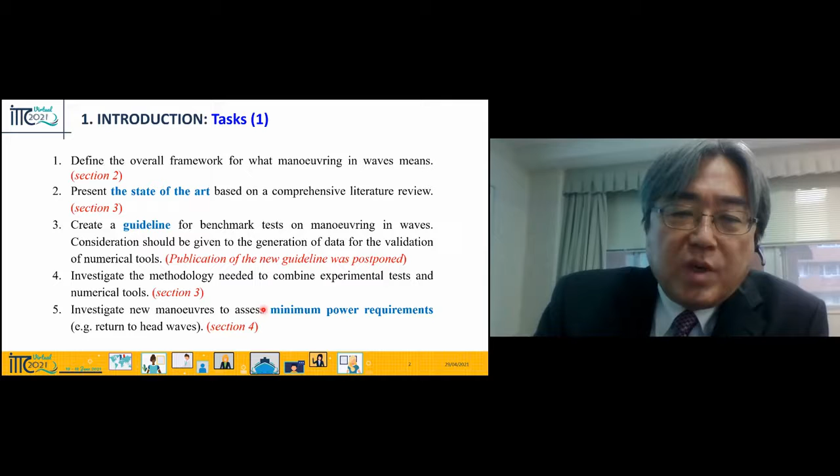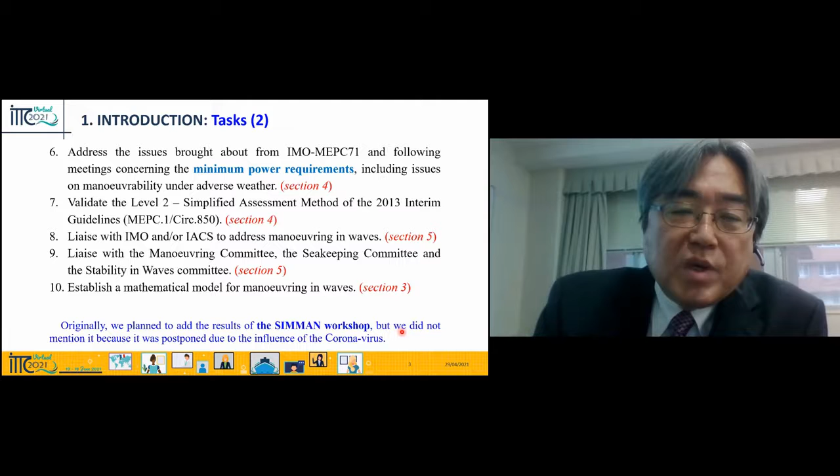Also, find the keyword of minimum power requirement. Originally, we planned to add the results of the SIMMAN workshop, but we did not mention it because it was postponed due to the influence of the coronavirus.

So the main topics in my presentation are shown here: state of the art of the prediction method of ship maneuvering in waves and minimum engine power requirement. Based on these results, we will describe the conclusion and the recommendation.

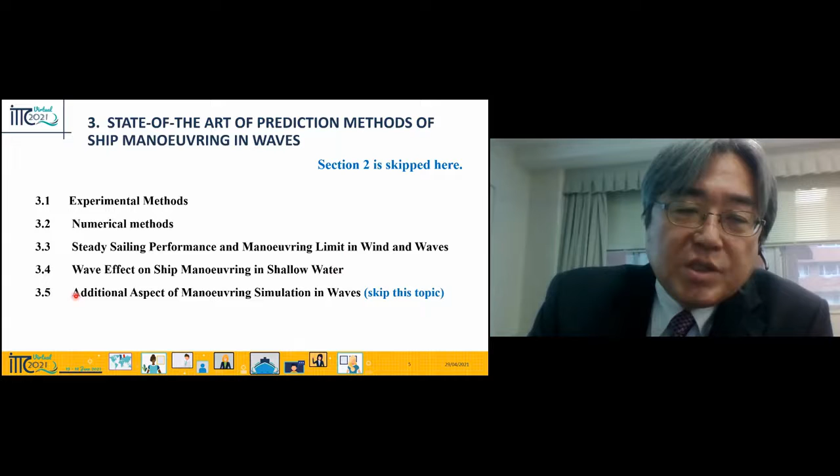The state of the art of the prediction methods of ship maneuvering in waves. In our report, you can find it in 5 sections: first, experimental method; second, numerical method; third, steady sailing performance and maneuvering limit in wind and waves; fourth, wave effect on ship maneuvering in shallow water; fifth, additional aspects of maneuvering simulation in waves. But this time, I'd like to skip these topics.

Experimental method. The experimental method was composed of 2 types of tests. One is a free-running test in waves; its main purpose is capturing the motion in waves of the ship. The second one is the captive model test; its main purpose is capturing the force and the moment acting on the vessel moving in waves. The purposes are quite different.

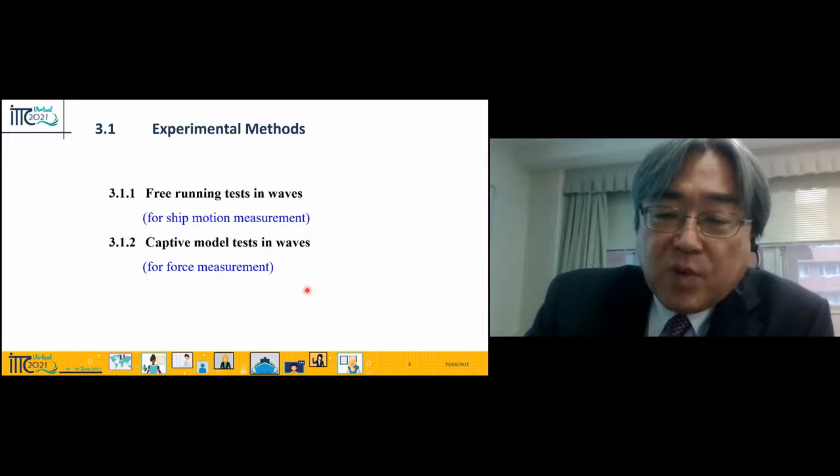Free-running test in waves. Nowadays we can find a lot of papers on tests in regular waves and also tests in irregular waves. Of course, the actual sea is not regular, it's actually irregular, but tests in regular waves are quite useful to understand actual phenomena about ship motion in waves, and for checking theoretical methods, the regular wave test is really useful.

In 1980, Dr. Hirano carried out the free-running test in regular waves. Nowadays you can find a lot of free-running tests have been carried out. In irregular waves, in 2006 Yasukawa carried out the test. The number of such tests is not as many as regular wave tests, but I think tests in irregular waves are really important because actual seas are irregular.

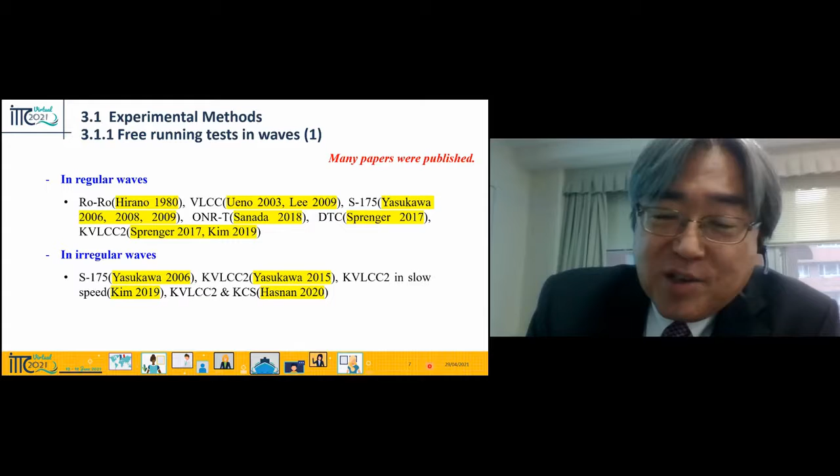Here I would like to introduce the measurement system, especially for measurement of the position of the ship motion in waves: the total station system. The total station system is a fully wireless system for position measurement.

This total station system originally comes from the civil engineering field. In this figure, you can find some boats here, and these are prisms for position targets installed on the boat. The target is basically a prism, and you can see this photograph of the prism.

This one is a camera of the total station. This camera can track the ship model position relative to the prism automatically from the side. This is the photograph of the camera of the total station; you can find a black circle here like an eye, which automatically tracks the target.

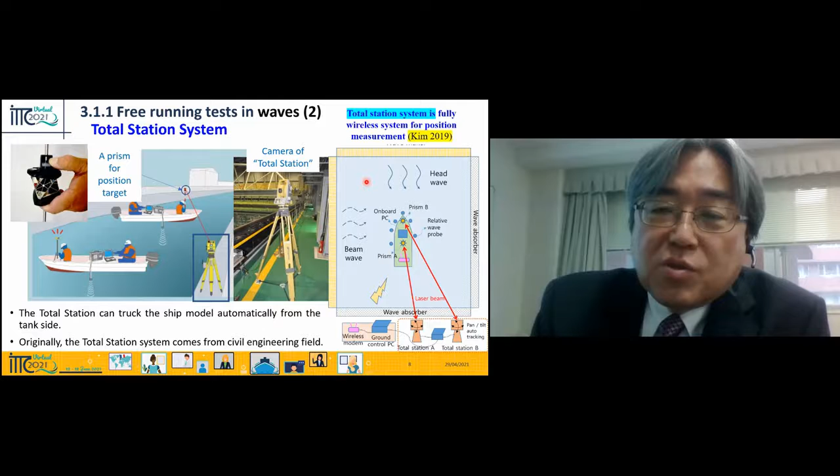Then we can measure the position. In 2019, Kim used this total station system to measure the position of the ship model in waves. That is the result: you can see the figure about the turning trajectory in regular waves.

You can find a lot of turning circles here. There are totally 6 trajectories plotted: calm water trajectory and trajectories in waves, where the wavelength changes, lambda by L equals 0.5 to 1.5. The waves are coming like here, and the ship is approaching like here. After executing the rudder steering, the turn starts and the trajectory moves like that.

So this is the trajectory in the free running model. You can find circular turning. In the wave cases, some drifting occurs during the turning.

Generally, the ship drifts in a direction different from the wave direction during turning. The wave direction is here, but drifting directions are like here in the case of lambda by L equal to 1.0 for the trajectories. In the case of lambda by L equal 0.7, drifting directions are like here. For lambda by L equals 0.5 cases, drifting directions are here.

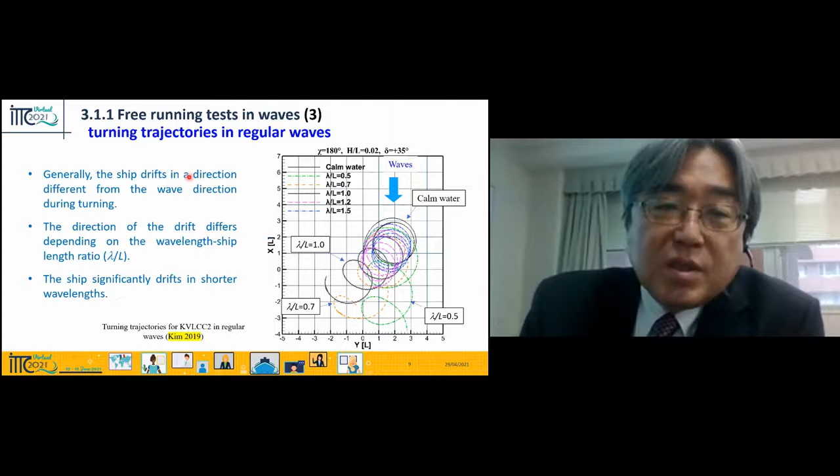This black line results from lambda by L 1.0, but in the case of lambda by L 0.7, it's shown as the dotted lines here. In shorter wave cases, the green lines here show the drifting distance, which is much larger compared with the result for lambda by L 1.0. So drifting phenomena during turning, both direction and drifting distance, depend on the wavelength.

In oblique cases, for heave and pitch, the wave-induced motion amplitude tendency is almost the same as the drift angle equals 0 cases. Then there are 5-degree drift angle cases and 10-degree drift angle cases, with almost the same heave and pitch amplitude.

But for sway and roll, the lateral motion, there's a big influence. Of course, in the drift angle equals 0 case, sway is almost 0 and roll is almost 0. But with some drift angle, sway and roll appear more, and in the case of roll, they become quite large values in the long wave cases.

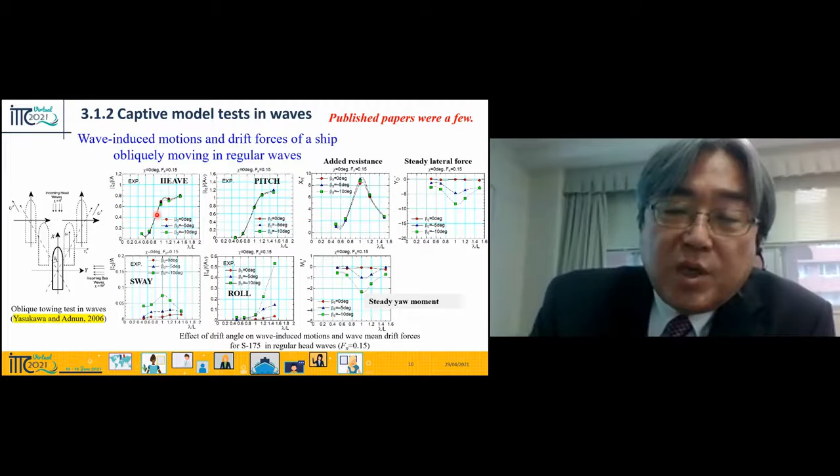Okay, next I will talk about the numerical method. Works addressing the topic of maneuvering can be classified into 4 main groups: the mean wave force method, the two-time scale method, the unified method, and the CFD-based direct simulation method.

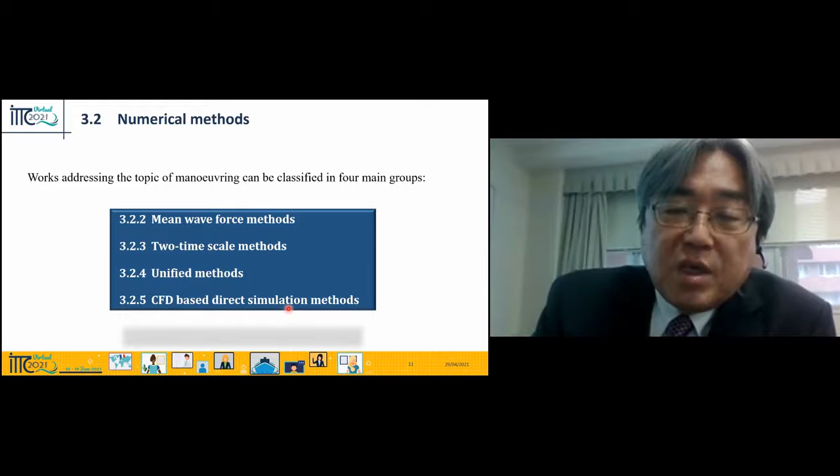First, I will describe the mean wave force method. Basically, this method is almost the same as the usual maneuvering model. There are no changes to the maneuvering model, but only mean second-order wave forces are added. The mean second-order wave forces are calculated previously for all headings, frequencies, and speeds, and stored as multidimensional tables. In that sense, the mean wave force method is quite simple and nowadays widely used.

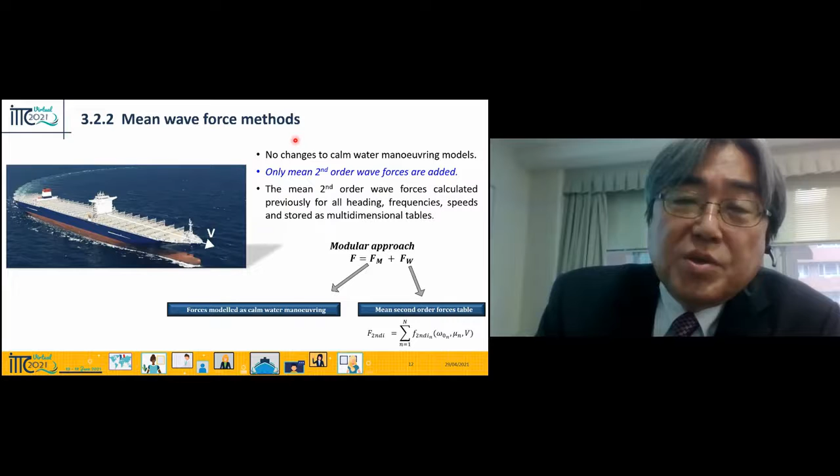Next is the two-time scale method. In this method, first we assume that the maneuvering in waves total ship motion is expressed as the usual maneuvering motion plus wave-induced motion. Because the maneuvering motion is basically low frequency, but the wave-induced motion is high frequency, we can treat these two separately.

So the usual maneuvering model is basically the same as in the mean wave force method, but we also have to consider the seakeeping model. The two models are solved separately, and then, of course, information exchange is really important. After solving the maneuvering problem, we can get the ship position, ship orientation, and ship speed.

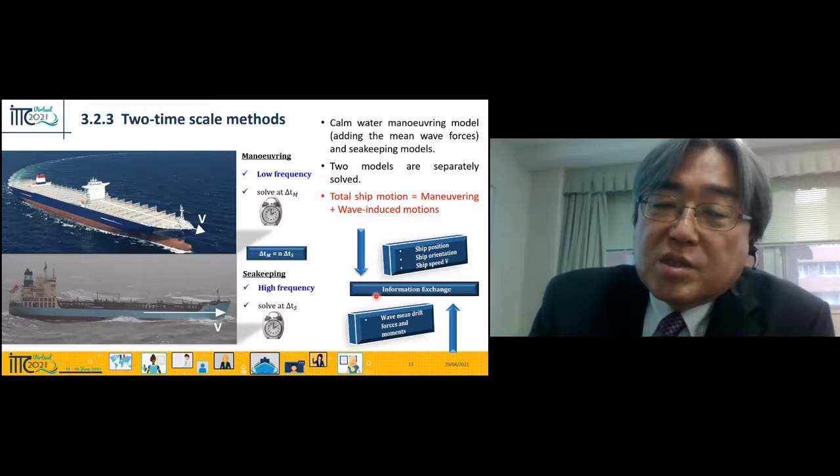Based on such data, we can calculate the wave-induced motion in the seakeeping model. So this kind of information exchange is really important.

Next is the unified method. This one is a more general formulation. The motion equation here is basically 6DOF, a 6 degree-of-freedom motion equation is treated. But the problem is the prediction or expression of the forces and moments acting on the ship.

When considering maneuvering waves, we have to consider the first maneuvering forces such as the rudder force, propeller force, and some damping force related to maneuvering forces. At the same time, we have to consider the radiation forces for seakeeping sense, and the wave-induced force. This method easily includes a nonlinear effect through the nonlinear Froude-Krylov forces, and we have to consider the second order mean forces. The rational prediction, rational expression of the force and the moment, that is a problem. But this general formulation is possible.

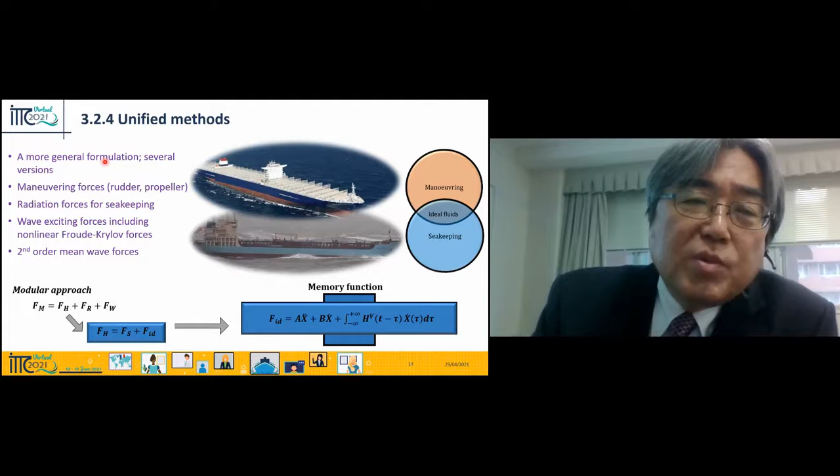So then now there are several versions. So then here we introduce the calculation example by the two-time scale method.

So this one is a turning trajectory in waves. The rudder angle equals 35 degrees for starboard turning. Waves coming here means beam waves. Lambda by L equals 0.7. The result is in regular waves.

Red color means calculation results, trajectories. Dots in blue color are experiments. The calculations capture well the tendency.

Okay, this one is a comparison of the time histories: yaw rate, drift angle, the heave. This is a calculation of the yaw rate, calculation example. You can see the 2-time scale method captures well the high frequency phenomena, and the agreement with the experiments is acceptable.

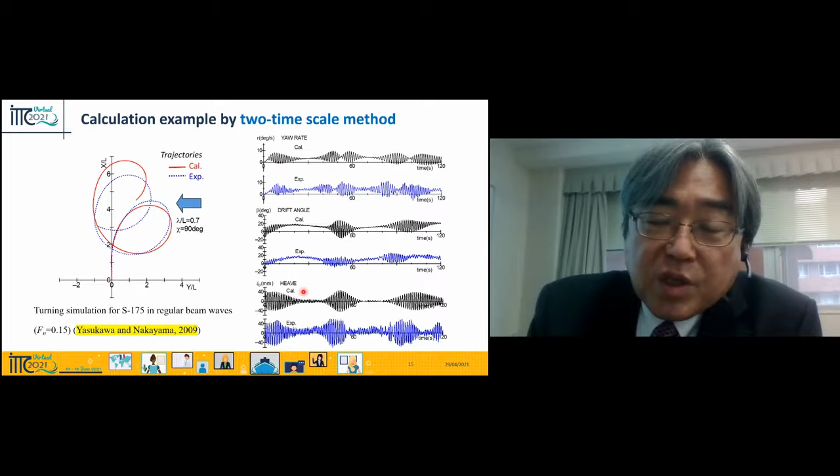Drift angle is here, heave motion during the turning. So then there's an agreement between calculation and experiment that is acceptable.

Okay, next is a CFD-based direct simulation method. Direct simulation using computational fluid dynamics provides a better understanding of the hydrodynamic problem of ship maneuvering. It can solve specific local flow details around the hull and its appendages together with the ship motion.

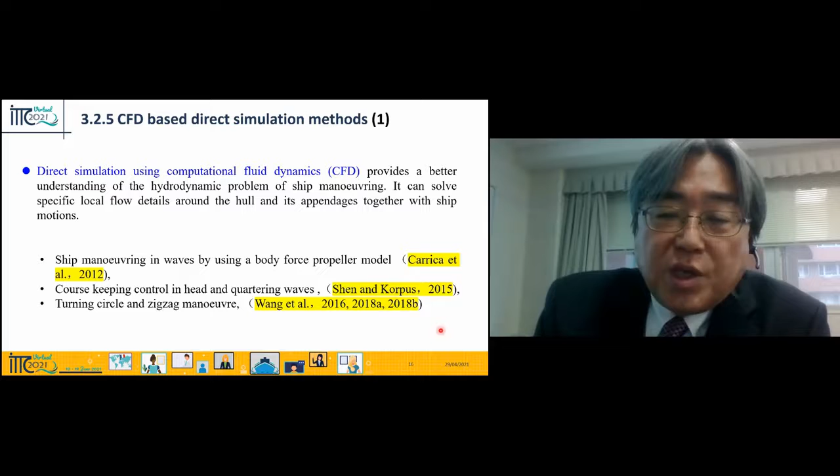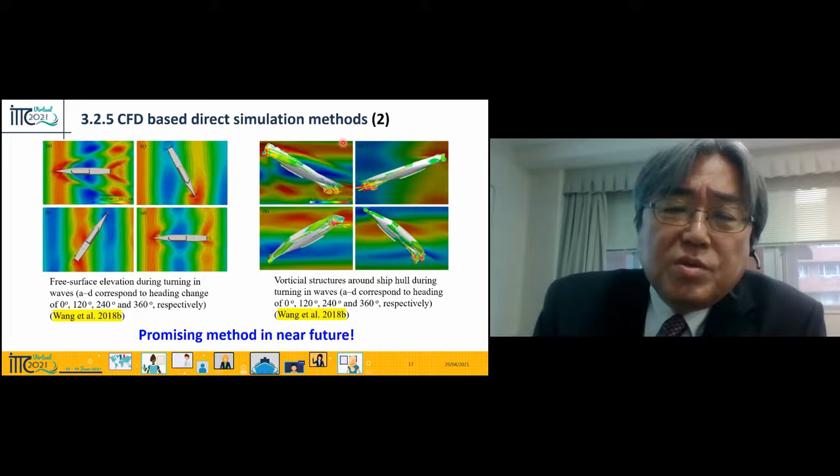So then now several papers are published as shown here. Okay, here I'd like to introduce the results. So then you can find this one is turning in wave cases, and you can find some deformation of the free surface. At the same time, we can capture some flow detail, especially in the vortical structure around the ship hull during turning in the waves. Nowadays, computational time is quite huge, but I think they're really promising in the near future.

Okay, next I'd like to talk about steady sailing performance and maneuvering limit in wind and waves. What is steady sailing performance? This one is composed of 2 elements. One is average steady sailing condition, SSC, such as check helm, speed drop, hull drift angle, etc. of a ship moving straight in constant wind and waves.

This value is easily obtained by solving the motion equation, the steady motion equation. So then we can get a steady solution. If we can get a steady solution at that position, we can check the course stability. So then there's the steady value SSC and course stability checking. So then such kind of performance is called steady sailing performance here.

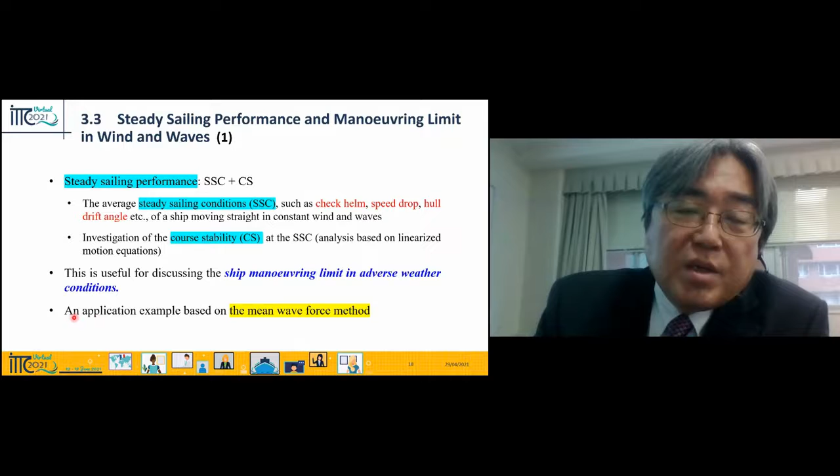This one is really useful for discussing ship maneuvering limit in adverse weather conditions. This is basically treated as an application example based on the mean wave force method.

Okay, this one is a result. This one is a steady solution with steady ship velocity, check helm, hull drift angle. In that graph, the horizontal axis means 0 is the heading angle, 90 degrees is beam waves, 180 degrees is following waves. So then we can change the weather condition from Beaufort scale 6 to Beaufort scale 10. In the case of Beaufort scale 10, ship velocity is 5 knots in the wave, in head wave cases.

So then the maximum check helm is almost 10 degrees, so this ship has a sufficient margin for safety. Anyway, this one is the result for a pure car carrier. So then the maximum hull drift angle is almost 7 degrees. Based on such information, we can discuss the maneuvering limit in wind and waves.

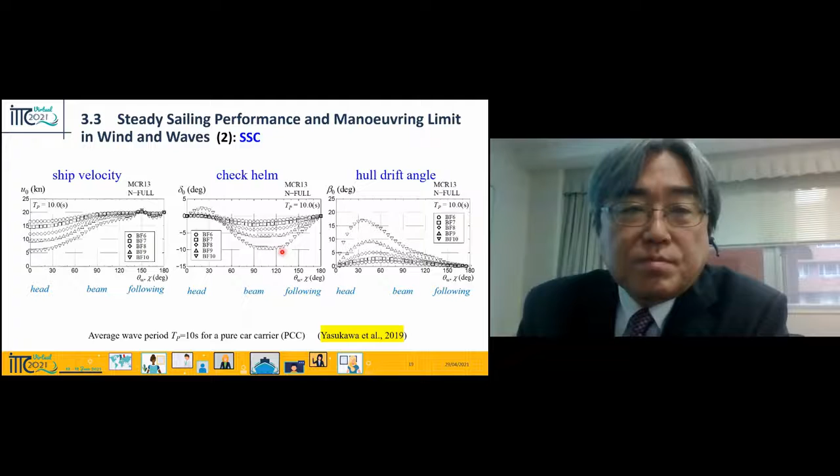Next, wave effect on ship maneuvering in shallow waters. This is a really complicated problem because there is a limitation more than the water depth. So then there's a wave coming, and there's ship motion that appears. So it's a really complicated problem to deal with.

So then this result was from Tello Ruiz et al. in 2019. This result includes lateral force, roll moment, yaw moment. They only measured steady force and moment in shallow water in head waves. Results show the mean wave effect is larger at low speed cases, but drift angle effect on the mean wave forces is not so significant.

But this experiment has some big restrictions because they carried out tests on a fully fixed ship model, with no induced motion. In the seakeeping sense, they just carried out the test as a diffraction problem. So then I think more work on these topics is yet to be investigated. I think more investigation is needed.

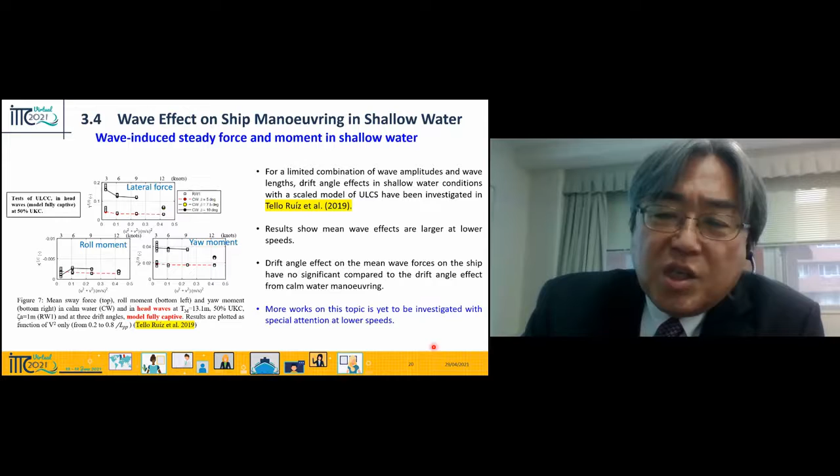Okay, next let's move to the minimum engine power requirement.

That is the background. IMO adopted the Energy Efficiency Design Index (EEDI) for new ships to reduce shipping greenhouse gas emissions via improved ship design and operation. There was a concern that one of the most effective ways of reducing the EEDI is simply by choosing a smaller main engine, thus reducing the ship's design speed. Within IMO, a debate took place on how far speed reduction could be used to attain low levels of the EEDI. As a result, it was decided to limit the use of this method so that it does not lead to unsafe and underpowered ships that may lose maneuvering capability under adverse weather conditions.

So then we were given the task to address the issue brought about from IMO MEPC 71 and the following meeting concerning the minimum power requirement, including issues on maneuverability and adverse weather. Validate the level 2 simplified assessment method of the 2013 interim guideline.

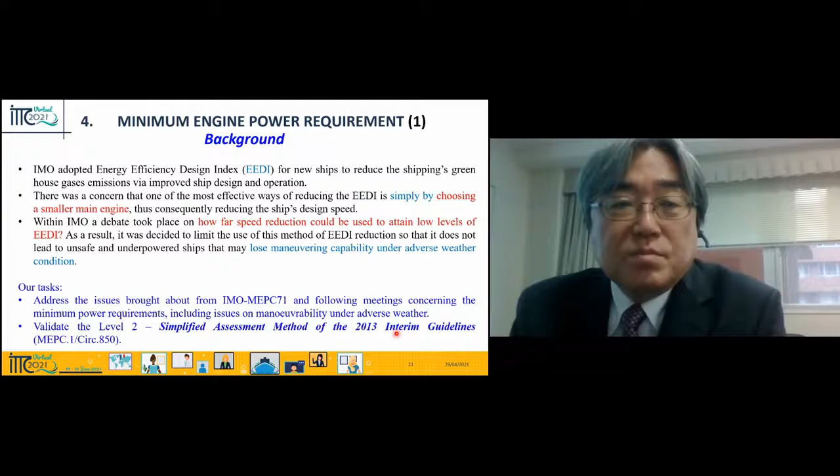Okay, so first we introduce some assessment: revision of the 2013 interim guideline for determining the minimum propulsion power. In the assessment, there are two methods. The first one is level 1. This one is quite simple, based on some existing database, just taking some line.

So when checking this graph, this minimum line is like that. So this line is, I think, too simple. So then this level 2 assessment was proposed. This one is quite straightforward.

First, we have to define some weather condition. Next, based on weather condition, we have to calculate the resistance: calm water resistance, aerodynamic resistance, added resistance in waves, and appendage resistance. Based on these results, calculate required power, required advance coefficient, required RPS, required delivered power. I think they're quite reasonable.

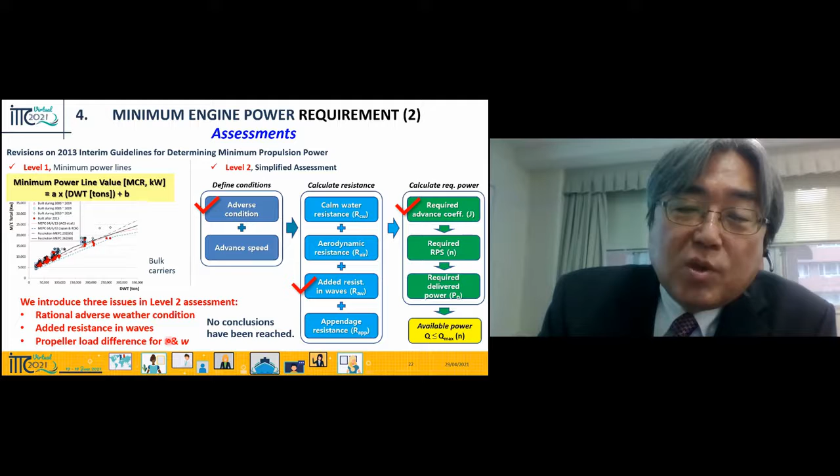But there are some issues in this assessment. First, what is the rational adverse weather condition? Second is added resistance in waves — the prediction method itself is no problem, but how about its accuracy? Third is the propeller load difference: calm water results and wave cases have quite different propeller loads, so the thrust deduction and wake fraction change. How should we treat this problem? At present, no conclusion has been reached, but we'd like to discuss it in more detail.

About adverse weather conditions, of course we can propose many kinds. Okay, to summarize, that is the history of the proposal, but this is summarized for the adverse weather condition.

Okay, H sub 1/3 — this is the significant wave height. This one is the average wave period. This one is the wind velocity. The wave height is quite different, and so is the average wave period. This is a proposal with some range that was proposed for the wave and wind velocity.

What is the most important, most significant factor? Okay, the result is the wave height.

You can see that based on this adverse condition, we calculated some resistance components. The blue colored column is the calm water power, which should stay the same. The gray colored column is the air resistance, which depends on wind velocity. Then the red column is the biggest one — this is the added resistance from waves. So the most important factor is the significant wave height. In the 7-meter wave height case, it's really big, because the added resistance in waves is basically proportional to the square of the wave height.

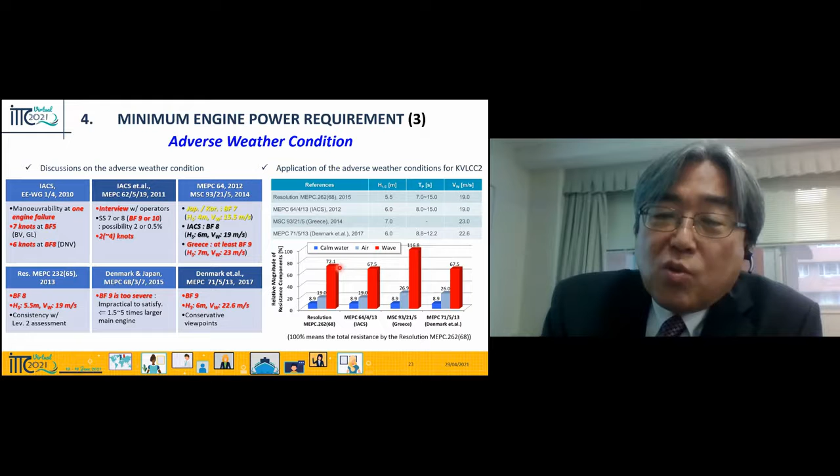So then, what is a reasonable wave height? That is the problem. Okay, next we want to calculate the added resistance in waves. For that, of course, we need some prediction method.

Nowadays, some similar methods were presented. You can find this table with the program names here. You can find six methods. The type is some empirical based on the 2D strip method, the 3D panel method. The calculation methods are slightly different, and the correction methods applied are also different.

Using these six methods, we carried out a prediction for the KVLCC2 tanker at Froude number 0.055 — a slow case, because in waves speed drop occurs. You can find this triangle mark, which is the experiment, and the other lines are prediction results. The agreement between the experiments and predictions is not so good — the larger one is here, the smaller one is here, but the experiment is here.

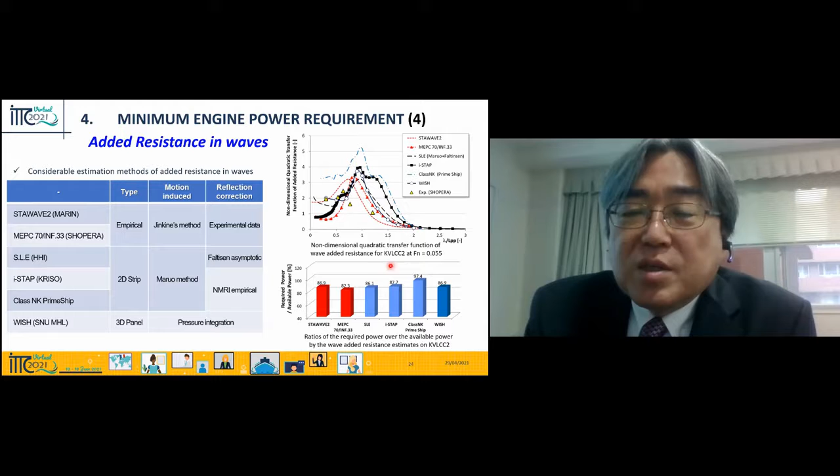Next is the propeller difference in calm water and waves. There is some history here. First is prediction of the thrust deduction factor and wake fraction, using some empirical method, or sometimes a tank test result. In the case of KVLCC2, the wake fraction equals 0.35, but the thrust reduction rate is 0.245. At this design speed, the Froude number is almost 0.141.

Some prediction methods give the same order. But in MEPC 71 and 72, China proposed and pointed out that this value changes depending on the propeller load. Moving in waves, propeller load changes, speed drops, so the propeller load changes.

So the wake fraction and thrust reduction also change. In MEPC 71, wake fraction becomes 0.15. China presented that wake fraction changed to 0.15, and thrust reduction changed to 0.1. So these values are quite different.

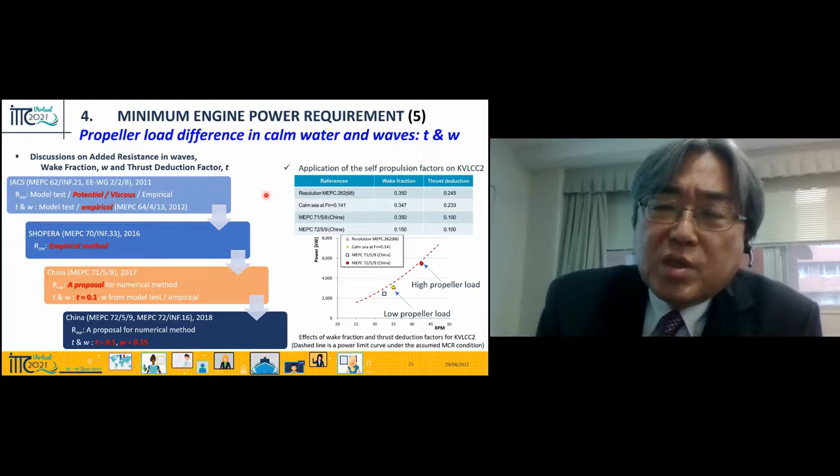If we use the larger values, 0.35 and 0.25, the minimum power is like here - this is the level. But if we use smaller values, the minimum power becomes large. So this difference is quite big. That is a problem, but unfortunately, at present, no conclusions have been reached.

Conclusion of activities about prediction methods of maneuvering in waves. A large number of works on maneuvering in waves methods have been published during this period. Experimental research remains valuable and is being used complementary to numerical research. Due to technological development progress, testing in irregular waves with large wave height is becoming more feasible.

Direct CFD simulations of maneuvering in waves were presented by several authors. Using CFD simulations, propulsion and turning motion, as well as the maneuver of a free-running model in regular waves, can be conducted. However, due to the high computational time, computational cost, and even longer simulation time requirements, direct CFD maneuvering simulation in irregular waves is still a challenging problem.

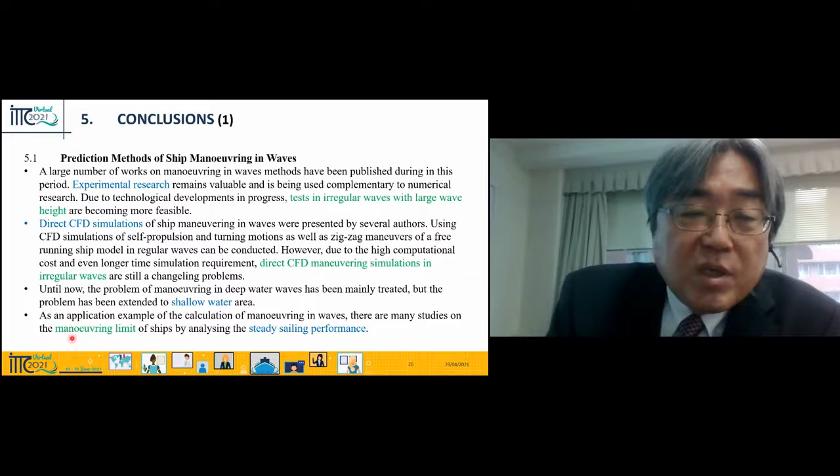Until now, the problem of maneuvering in deep water waves has been mainly treated, but the problem has been extended to shallow water. As an application example of the calculation of maneuvering in waves, there are many studies on the maneuvering limit of ships by analyzing the steady sailing performance.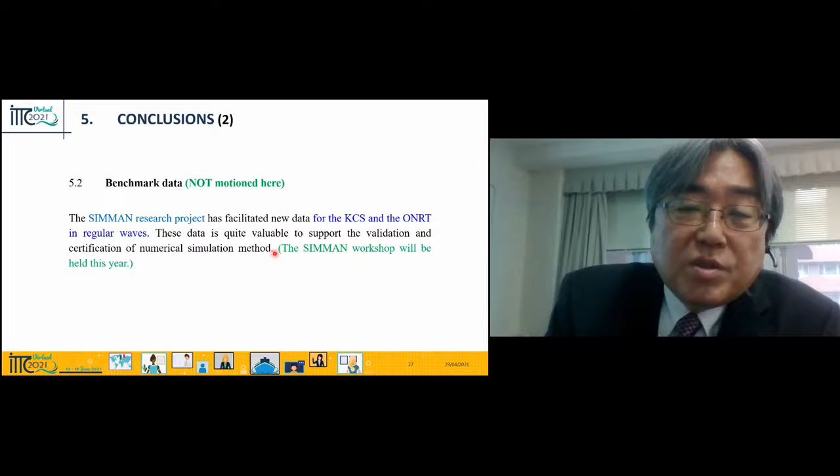About benchmark data, this time we did not mention it here, but the SIMMAN research project has facilitated new data for the KCS and the ONRT in regular waves. This data is quite valuable to support the validation and certification of numerical simulation methods. The SIMMAN workshop will be held this year.

Minimum engine power requirement. The issues brought about from IMO MEPC 71 and the following meetings were addressed concerning minimum power requirements. Accurate estimation of the added resistance in waves and self-propulsion factors in higher propeller load conditions are decisive factors for the simplified assessment.

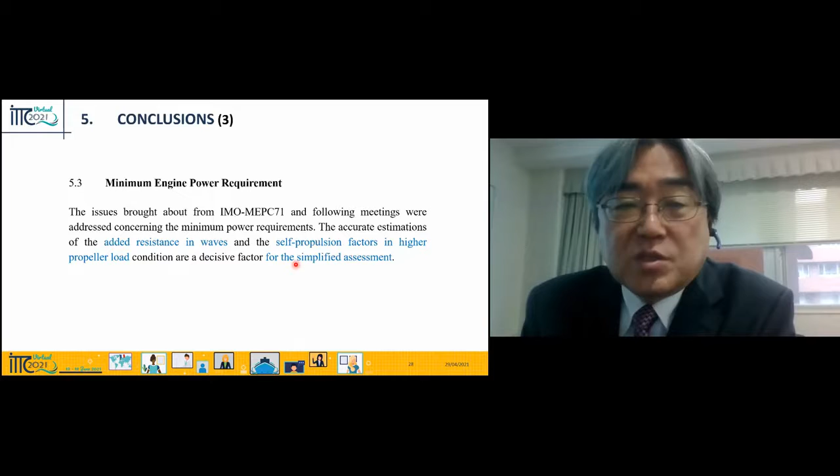To improve the numerical method for maneuvering in waves, the following actions are needed. Validate the numerical method for mean wave drift forces, especially the steady lateral force and yaw moment, acting on an advancing ship, in cooperation with the Seakeeping Committee.

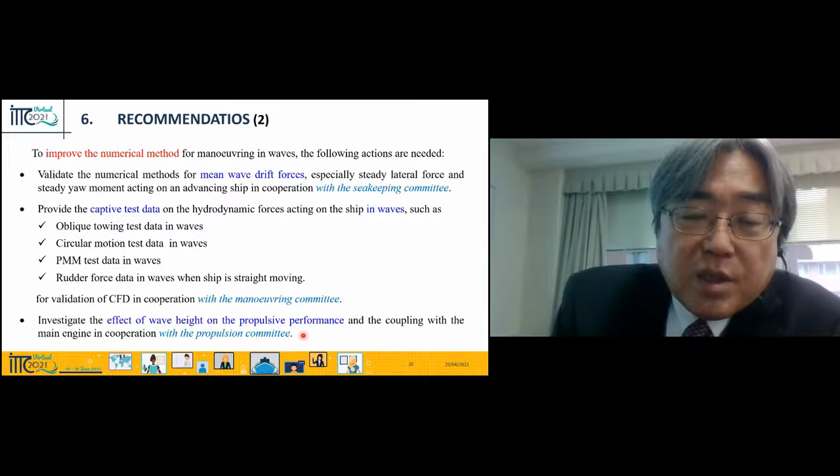Provide captive test data on the hydrodynamic forces acting on the ship in waves for validation of CFD, in cooperation with the Maneuvering Committee. Investigate the effect of wave height on propulsive performance and coupling with the main engine, in cooperation with the Propulsion Committee. No time, so this time we didn't mention these topics.